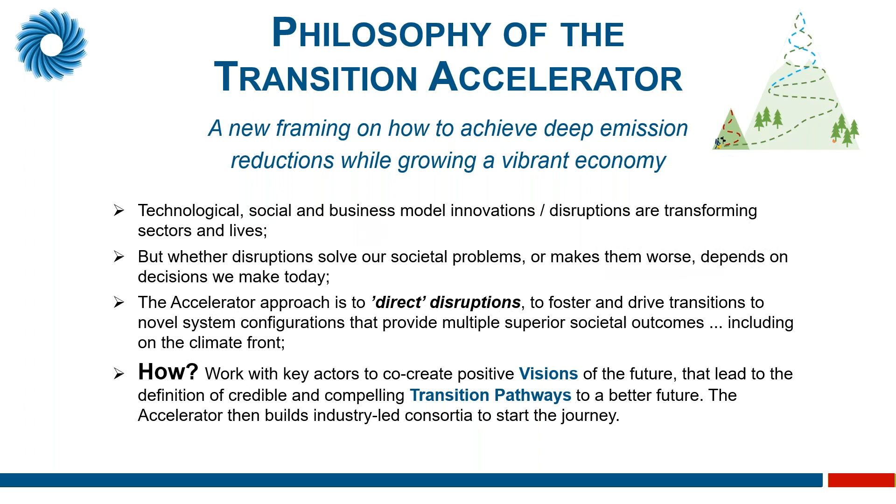So we'll start with Report A. Report A is really a fantastic report that documents the current state of freight transportation in the province, along with looking at all the historical and emerging trends that are going on. Unfortunately, I don't have time in today's session to give a detailed overview, so I'm just going to give you the key learning.

So this sector is a large contributor of greenhouse gas emissions, accounting for about 8% of the province's total. But it is also challenged with many other issues, from air pollution to inefficient load management to labor shortage to low profit margins. All of this really makes the sector poised for disruption. It makes it a hotspot for innovation.

And we spoke a lot with industry, and what we heard from them is that they're really ready to embrace change. This took us a bit by surprise because we expected them to be reluctant, but they weren't. They were ready to embrace change, and it's because of all these issues. And they really wanted to be the drivers of their own destiny. They wanted to be a part of this pathway. And really, this attitude makes it an ideal place to start and embark on this transition pathway.

So quickly moving on to Report B, and this is the techno-economic assessment for the zero-emission alternatives. In this report, we start with the current technology, and this technology dominates the freight sector all across North America, and likely across the world as well. And it is the diesel internal combustion Class 8 truck. So in our study, we took what we saw was a typical shipment in the Alberta landscape, and it is a 27-ton truck, and that includes 17 tons of payload, traveling a distance of 750 kilometers in between refueling.

And what we wanted to do is understand the energy flows of the system. And to do that, we used a Sankey diagram, like the one you see here. So the way you read this diagram is you start with the primary energy on the left-hand side. And with each process along the value chain, you track the losses until you get to the end, which is your kinetic energy, which is moving the wheels. So effectively, it's a well-to-wheel analysis. However, when we were conducting this analysis, we actually started on the right-hand side.

We took a typical diesel truck, and we assumed a fuel efficiency of 38 liters per 100 kilometers. And we assumed a drivetrain efficiency of 35%. What this means is for every liter or joule of fuel energy that is consumed, 35% of it is used to move the wheels, and the other 65 is lost as heat. So using a higher heating value, we were able to determine that the kinetic energy demand for this typical shipment is 3.8 gigajoules per truck. So this is an important number. And so we use this number, all else being equal, for the alternative drivetrains as the basis of analysis.

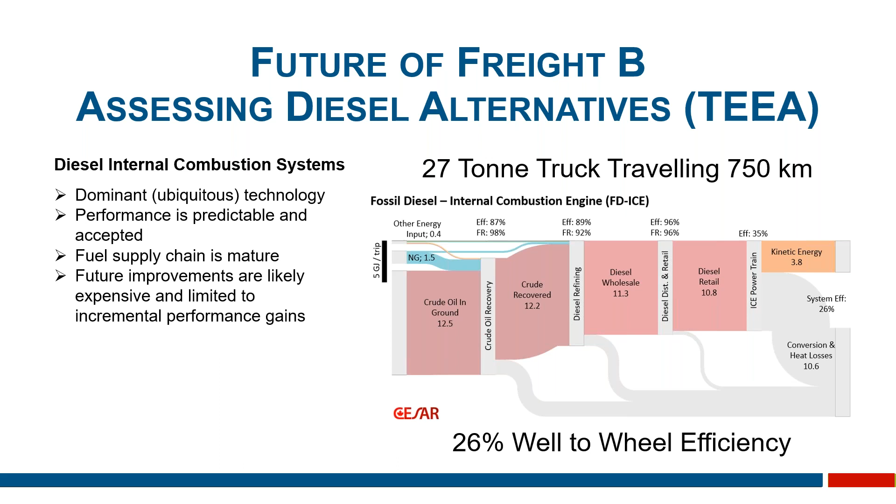You'll see there that the majority of the losses are at the powertrain, at the drivetrain. There's a lot of work being done to improve the efficiency of the drivetrain. However, these improvements are likely going to be very incremental and not going to get us to that transformative system level change that we're looking for. So let's see how the other systems compare.

So let's start with a biodiesel system. So we looked at a bio-based system, and we look at that same 3.8 gigajoules of kinetic energy per trip. But we are starting with a biomass that is converted to a liquid fuel using a Fischer-Tropsch technology.

We'll see here that you'll still have those significant losses at the drivetrain, but you're also going to have significant losses with the refining process. And what this makes is a system that is 16% efficient on a well-to-wheel basis compared to the fossil diesel system, which has an efficiency on a well-to-wheel basis of 26%.

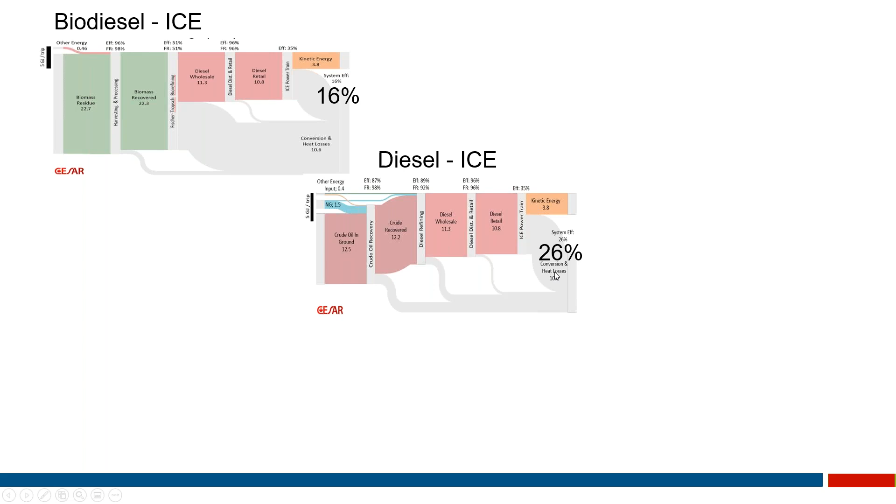Next, we considered a battery electric truck. The battery electric truck has an electric motor, which is very efficient. But it will see some other losses with the charging and electronics. And another area of loss will be with the power production. And this is an area that is commonly overlooked, but it must be accounted for on a well-to-wheel basis.

So in Alberta, we considered a future grid. We considered a grid that is 30% renewables and 70% natural gas combined cycle for this analysis. So this provided us with efficiency of 34% on a well-to-wheel basis.

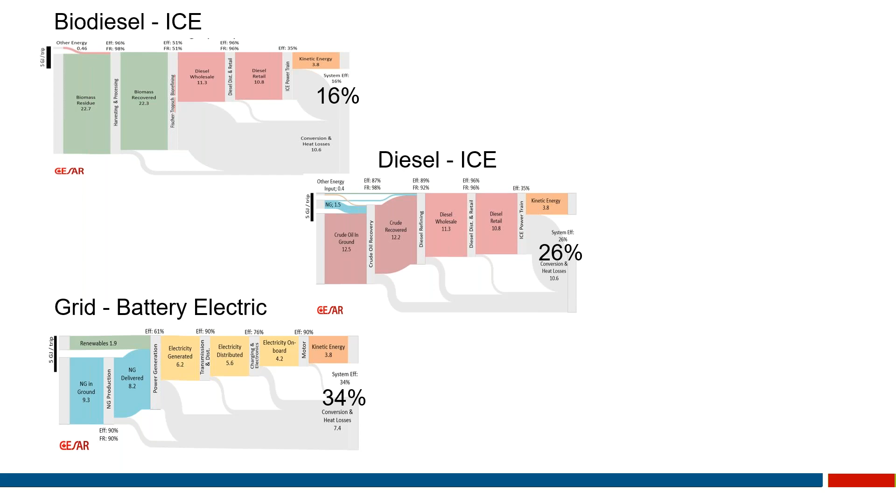So the hydrogen fuel cell electric also has an electric motor, which gives us the same efficiency gains on the drivetrain. However, because of the fuel cell, which converts hydrogen, which is stored on board, into electricity, there's an extra step in the drivetrain. So there's an extra source of loss that needs to be accounted for.

And then, of course, the hydrogen needs to be produced. So in this scenario here, we're looking at a blue hydrogen scenario where we're converting natural gas into hydrogen using a steam methane reform technology. And so we'll have some losses there. And then, of course, there's distribution.

So if we're looking at a green hydrogen scenario where we're taking wind and solar power generation to produce the hydrogen, it'll be a similar drivetrain system, but we'll see losses with the electrolysis upstream, which is used to convert the renewable power into hydrogen. So both the hydrogen systems and the battery electric systems have a higher efficiency than the diesel system already.

But why do we care? Why do we care about well-to-wheel efficiencies? Firstly, in a sustainable future, the less resources that we consume, the better. It just makes sense. You want to use less resources. But it also impacts the cost of the energy and the greenhouse gas emissions, which is what we're going to look at next.

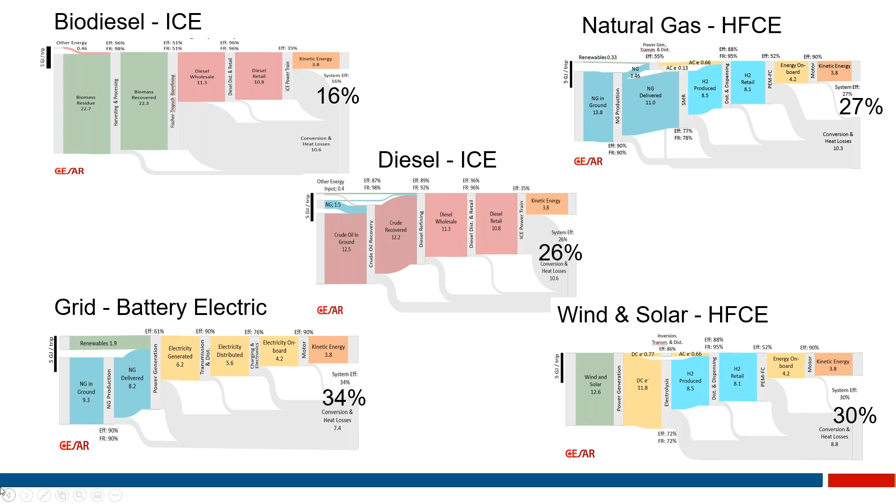So by following the energy flows that were presented in the Sankeys, we were able to estimate and compare the cost of the kinetic energy to move that typical system. So that's that 3.8 gigajoules. So by using this method, we are able to compare each of the systems equally while taking into account the differences in efficiencies.

For the hydrogen side, and actually even the battery electric side, we see that the cost of distribution is a major source of cost. And it's an area of great uncertainty, and that drives the cost really high. And the reason for that is because the distribution systems, for the most part, are non-existent. However, with scale, we project that these costs will come down substantially.

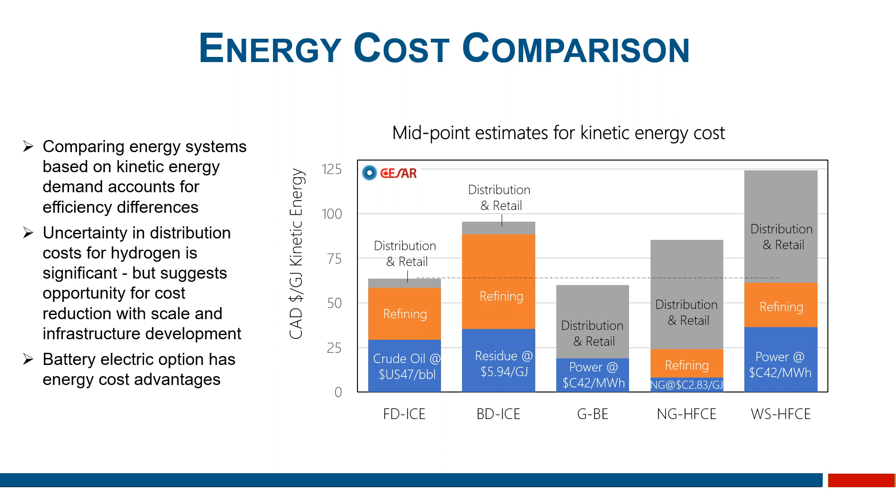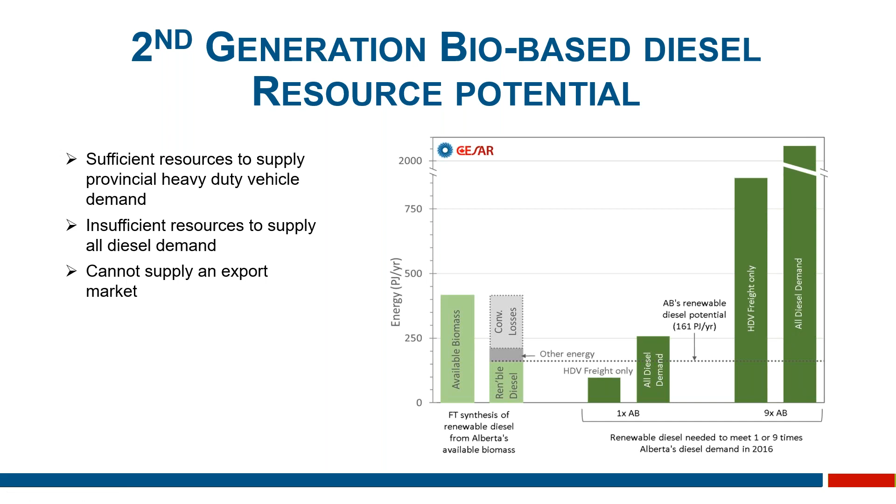So then we want to look at our capability to produce grid power to support the heavy duty vehicle sector and also to replace diesel in the other sectors as well. It may be possible. So to supply our freight market, our grid load would increase by 25%. To replace all of diesel, it would increase by 66%. But that actually means that we'd have to double the annual growth rate of our grid capacity by 2050. And that's quite substantial.

When we look to the export market, the increase in our grid capacity would be very significant. And realistically, Alberta doesn't really have a strong competitive advantage as a producer and supplier of low carbon, low cost electricity. So we're not in a great position to become an exporter and supplier of low carbon electricity.

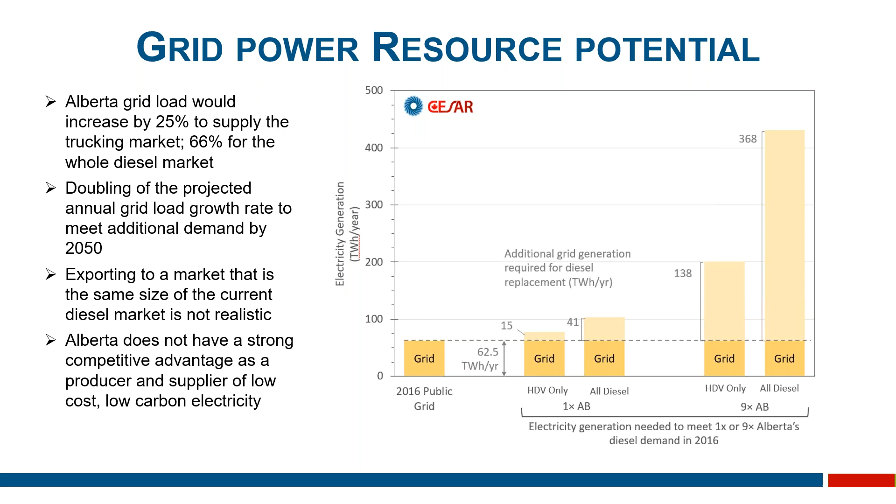So when we look to the hydrogen options, we have to really quantify the amount of hydrogen demand that there would be. When we look at the potential demand for hydrogen of Alberta's freight sector, we are going to need 76 petajoules of hydrogen per year, and that's equal to 1.4 megatons of hydrogen per year. As I mentioned briefly, Alberta is already a producer of hydrogen, to crack diesel and support the fertilizer industry. This 1.4 megatons per year is actually about 55% of Alberta's current production of hydrogen. So it's something that is achievable.

And if we're going to put an economic value to it, this 1.4 megatons of hydrogen works out to about $7 billion for the province. So if we are going to supply North America with this zero emission or very low emission fuel, the demand would be 13 megatons of hydrogen per year. And using that same logic, 13 megatons times a price of $5 per kilogram, that's an economic value of $65 billion. So this is of interest to the province.

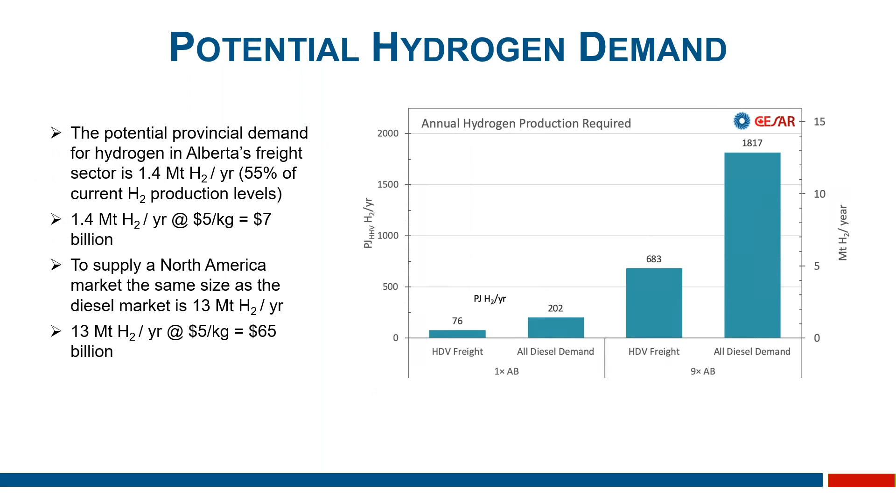So when we look at the resource potential, Alberta is very rich in natural gas resources. So if we just look at existing production, and combine it with the additional demand from the hydrogen market, we can see that we can easily supply not only our demand for hydrogen, but supply an export market as well.

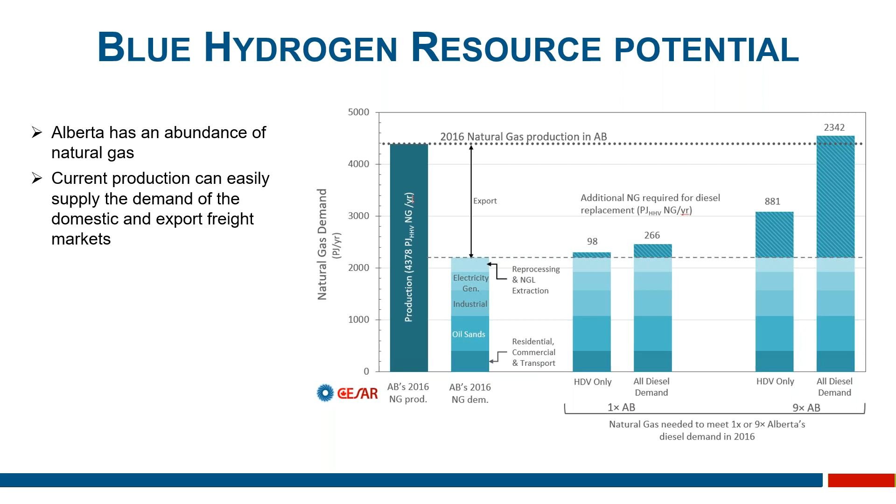Next, when we look at green hydrogen and our capability and resources to support a green hydrogen economy, we have to think that as Alberta has a really high greenhouse gas intensity grid, when we think about green hydrogen, we would want to complement it with a transition to a low carbon grid with the introduction of wind and solar power generation, or increase in the grid mix of wind and solar into the public grid.

So this is kind of a complex diagram, and I apologize for that, but I think it's very, very interesting if we look at it. The CESAR team, when we were contemplating this, we developed a grid model, and this is essentially the output of this grid model as we look to increase the percentage, the proportion of renewables in our grid.

So if we look here on this side, this is the grid composition that we have today, roughly. If we're going to go to that 30% target of renewables by 2030, which was the target of our previous government, and hopefully the current government continues on with that, we'll be here. So this is the portion of renewables.

But if we continue to increase the renewable capacity in our grid, but also supply the hydrogen market, we are going to be overbuilding the amount of wind and solar that is a part of our grid, but we're also going to be meeting the demand of our freight sector.

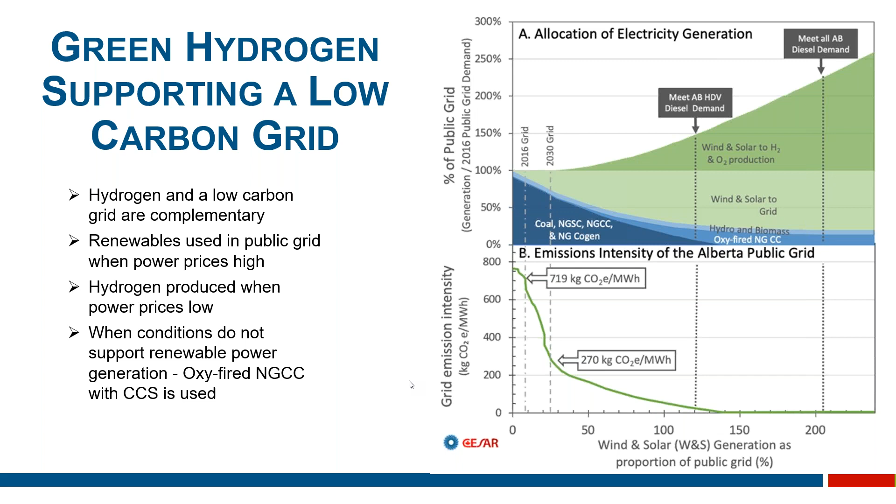So when we look at these similar column charts here in terms of increasing the grid size, it's following that same model. To meet the demand for the freight sector, we have to increase the grid size by 150%, and that would include 3,700 4.8 megawatt turbines. To support all the demand for diesel, the grid would grow by 205%, and that would be about 6,300 new wind turbines.

And if we were to supply a market that is 9 times the size of Alberta, so the same as our current diesel market, we would have to increase our grid load by about 11 times. So that's quite large.

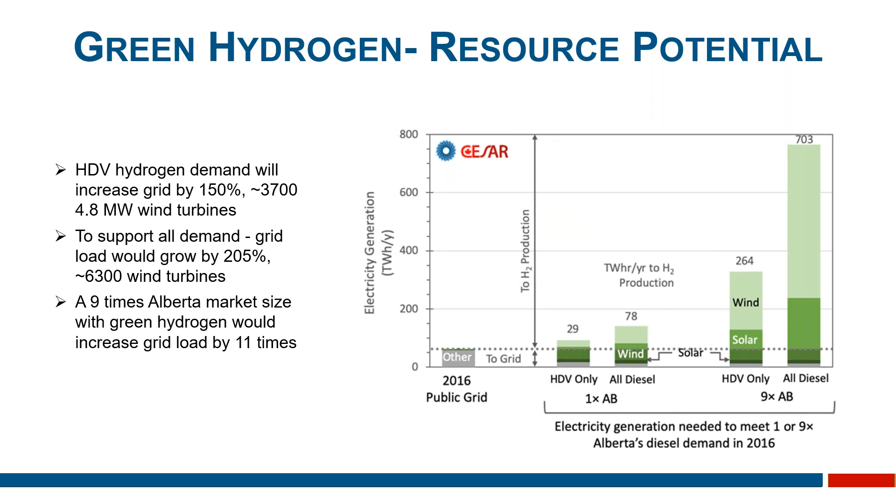And then we want to look at what is actually reasonable, which of what I'm suggesting on the previous slide is reasonable. And we look at the amount of land that it is going to take to produce that level of electricity using renewables. So on the top row here, this is the footprint of the wind requirement for that transition. And on the bottom is the solar footprint.

This is technically possible. It is compared to the size of Calgary. So it's technically possible for our large province, but is it reasonable? Is it socially reasonable? You know, something to be considered.

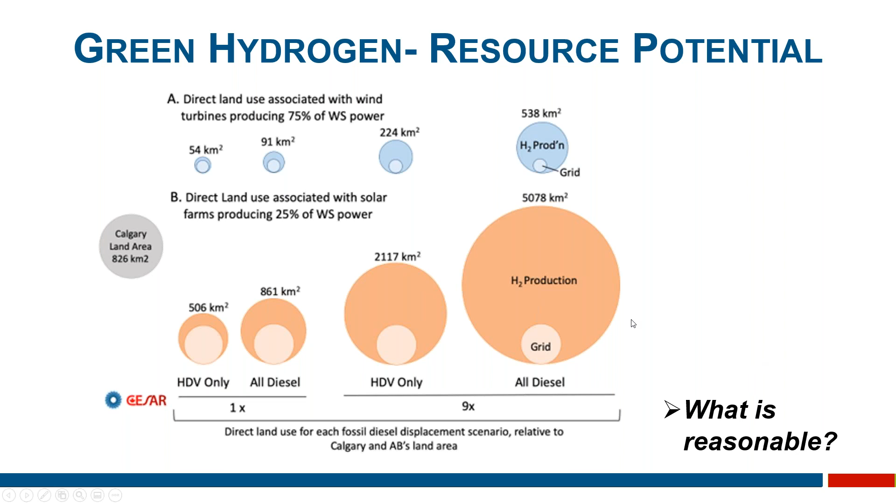So I'm just about to end it here. Somebody once told me that in any presentation, you can only have 4 key messages or you will lose your audience. So I pulled up 4 key messages for all of you, and I'll just read them off for you.

The heavy duty vehicle transportation sector does have high greenhouse gas emissions, and it is difficult to decarbonize, or has been thought to be so. But from our findings, the sector is really poised and ready for change. Secondly, both battery electric and hydrogen fuel cell electric are appealing zero emission options, but it really depends on the end use duty cycle and the grid intensity.

Next, the hydrogen provides an opportunity for Alberta to remain a supplier of transportation fuels in a net zero future. And this is really important. For a transition pathway to be compelling, it has to have economic value and be supported by the government and by investors, and this provides an opportunity.

And lastly, I want to say that both blue and green hydrogen can be a part of this pathway. Like I said before, blue hydrogen has economic advantages. It is a low-cost option, and it can provide an opportunity to build up the necessary infrastructure and pave the way for ultimately the zero-emission green hydrogen to take shape.

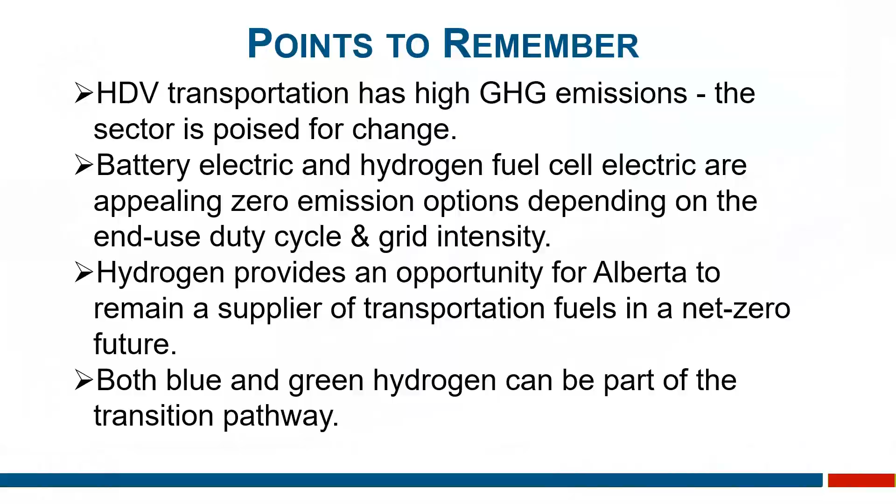Thanks, Jessica. We're a little tight on time. Hopefully, we'll still be able to take some questions. There's actually quite a few that came in. So I'm going to give the control to Marit. So Marit, sorry about that. Yes, can you? Okay. So you have control of the screen. You can go ahead. So can you see my presentation in full screen? Yeah, full screen. Thank you. Okay, perfect. So yeah, thank you, Joanne.

My name is Moritz Mottschall. I'm from the German Öko-Institut. I'm happy to present some results of our work. I'm a senior researcher in the resource and transport division, and you probably don't know the Öko-Institut, so this is a very brief commercial plug for us. The institute was founded about 40 years ago, and we are one of the largest independent research institutes within Germany, and our clients mostly are the European Union, national and state level ministries, but also companies, foundations, and NGOs. We have about 170 employees, of which 120 are researchers.

Part of our work for several years has been alternative drivetrains and fuel options for heavy-duty vehicles. Today I want to share some results regarding the comparison of the total cost of ownership, the TCO, for different technology options. These are the costs from a user perspective for Germany. All of my slides are case studies for Germany, and might vary when it comes to the conditions in Canada. The second part will show costs for the whole transition to a fully decarbonized long-haul freight in Germany from a macroeconomic perspective.

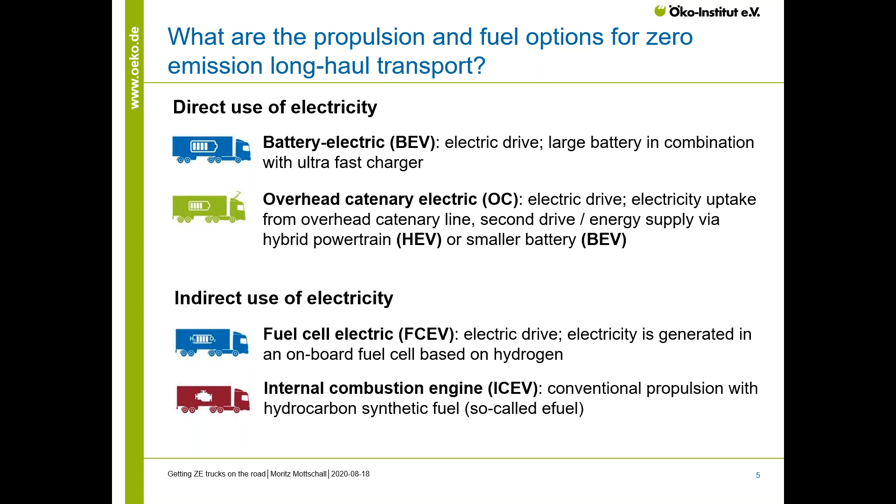Let's have a look at the cost from a user perspective, the TCO. When it comes to TCO, it's very important to highlight that these include taxes and truck toll and energy prices. So this TCO is always very country specific. These results might differ a lot in Canada. But for Germany, these are our results, and it is also important to highlight that there are, of course, a lot of assumptions.

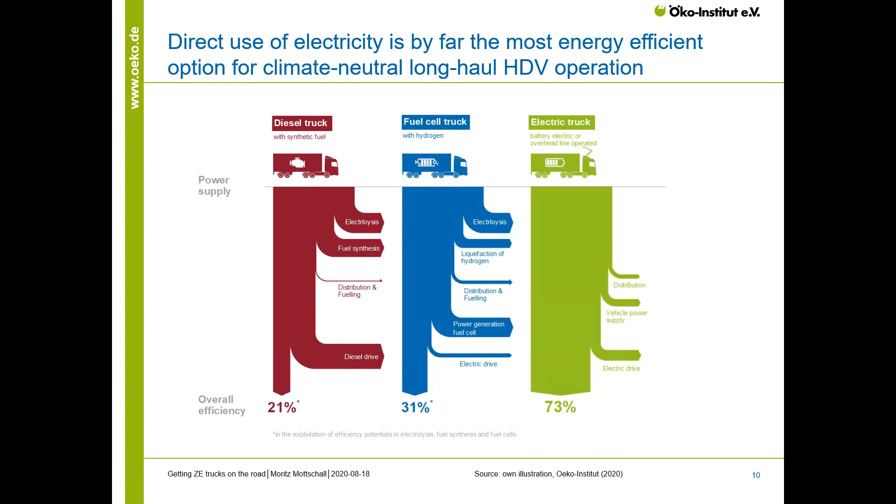So it is clear, from a German perspective at least, that we won't have the possibility to produce such amounts of additional renewable electricity. For comparison, today in Germany, the share of renewable electricity is about 46 to 50% in the mix, and in 2017 it was 210 terawatt hours. So it would mean that if we use green hydrogen produced in Germany, almost the whole electricity we have today would be necessary for long-haul freight and fuel cell electric vehicles.

So from an energy standpoint, from a German perspective, with direct use of electricity it will be possible to produce the electricity within Germany, but for fuel cell or power-to-liquid, it is very likely that we will be dependent on imports of these fuels. So let's have a look at the macroeconomic perspective.

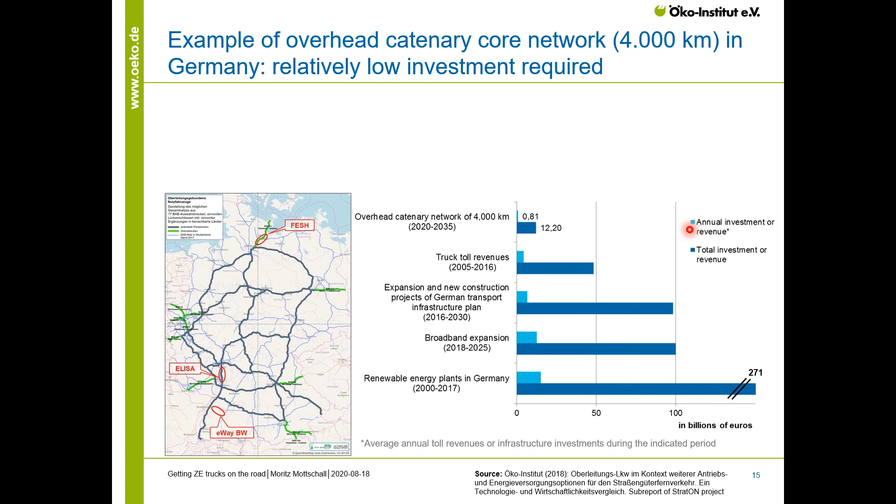And I just want to make a brief comparison. The investment costs for an overhead catenary network of 4,000 kilometers for Germany in total would be more or less 12 billion euro. And for comparison, the total investment costs for the infrastructure until 2030 are about 100 billion euro. For broadband, it's also 100. And Germany has such a high share of renewable electricity today because of a funding scheme since the 2000s, and with this funding scheme, there was already funding for renewable plants of about 270 billion euros. So in this comparison, this 12 billion seems manageable.

So what we see is that rapid infrastructure development is the key requirement for relevant greenhouse gas emissions reductions, and that framework conditions and tools like the CO2-based truck toll are very efficient to achieve this greenhouse gas reduction.

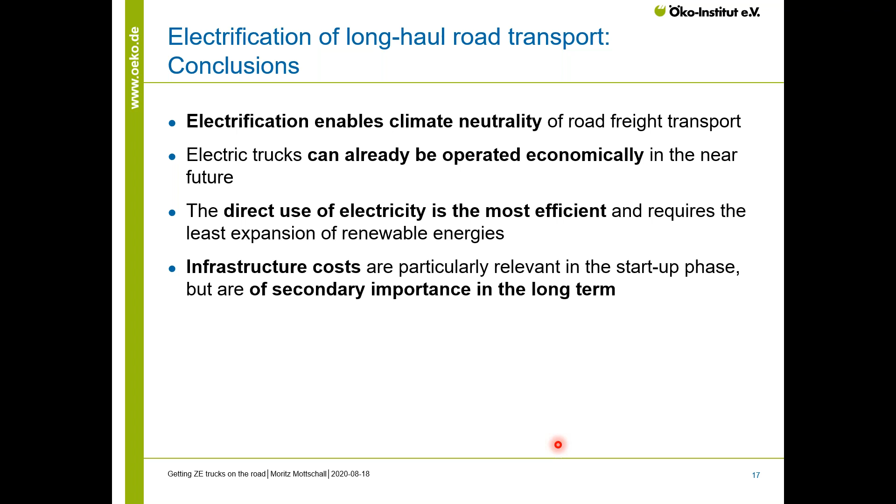The direct use of electricity, as I have shown, is the most efficient option, and it requires the least expansion of renewable energies of all these options. The infrastructure costs are particularly relevant in the startup phase, but in the long term of secondary importance. And the greenhouse gas mitigation is highly dependent on the speed of the infrastructure development.

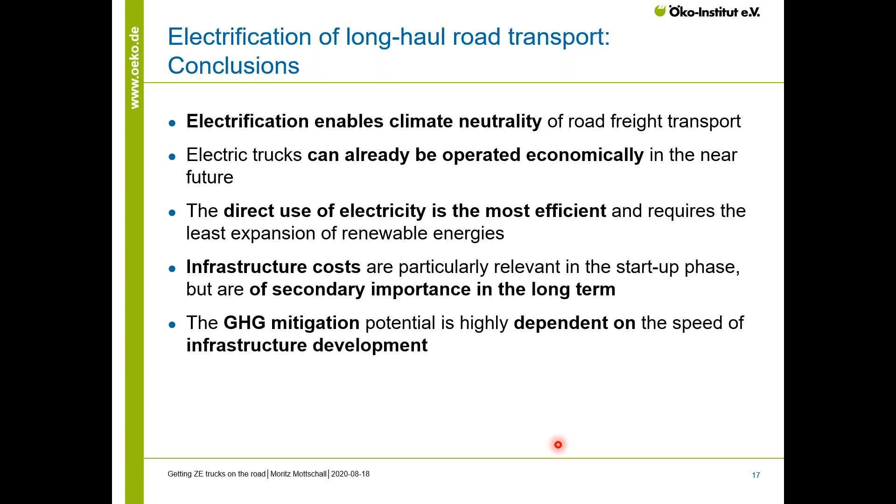So what are the necessary next steps? What should happen to realize these greenhouse gas potentials? It is necessary to align freight transport policies with greenhouse gas emissions to obtain planning security for all market participants. It is important to develop a reliable infrastructure expansion plan, and also the public funding of the infrastructure as a guarantee for the infrastructure expansion for all these stakeholders.

It is also helpful to set minimum quotas for new electric truck registrations, or to create more ambitious CO2 targets for heavy-duty vehicles after 2030, and to create framework conditions like a CO2-based truck toll which support the shift to zero-emission vehicles. And in the near term, it would be helpful to realize larger scale implementations of these projects on public road space to gain more practical experience.

And as I said, for Germany or for Europe, international cooperation is important. It's important to create cross-border technology development and standardization from today on, actually.